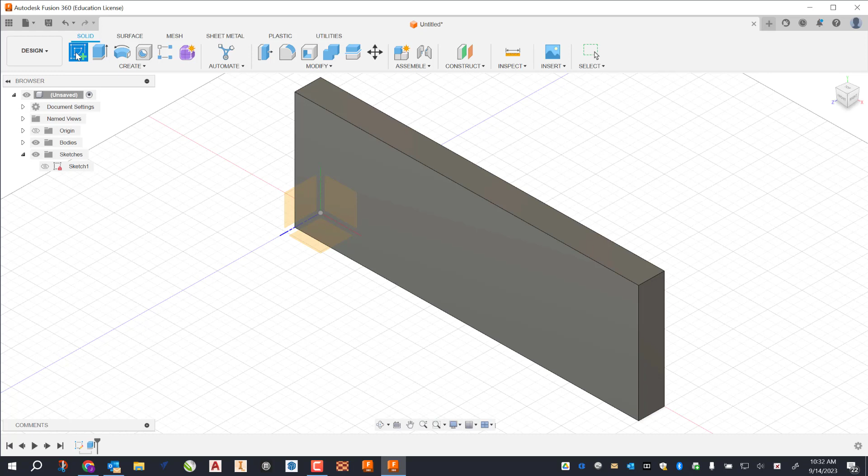So if you remember, everything always starts with a sketch. So I have it in isometric mode right now. This is what I like to do so I can make sure I can select the correct face. So I'm going to go ahead and create a new sketch. And just like the last time, it's asking me where to draw this sketch. I want to make sure I'm drawing it on that front face. If you notice, that's kind of highlighted. I want to make sure again that this front face is highlighted, and then I can click on that.

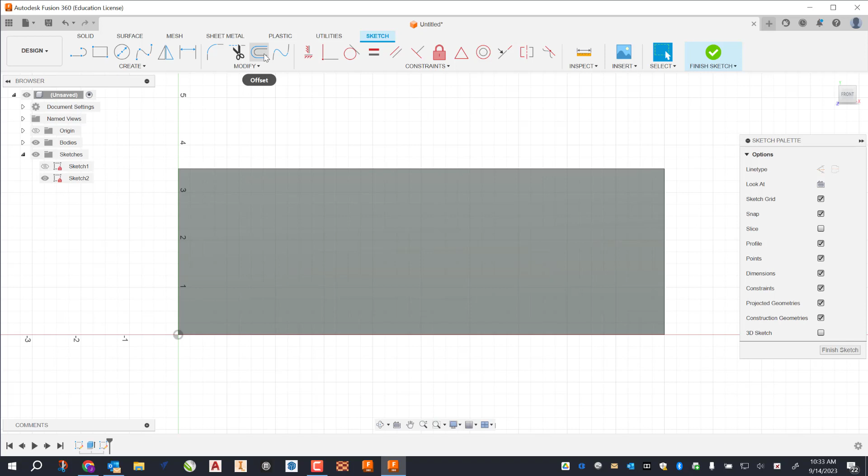So now that I've got my front face highlighted, the first thing I want to do is just create that recessed pocket. So I'm going to use what's called the offset tool. Under our modify, we've got our offset tool right here. If you don't see it up here in the toolbar, if you click on modify, it will come down here to the drop down, and I'm going to go ahead and select my offset tool.

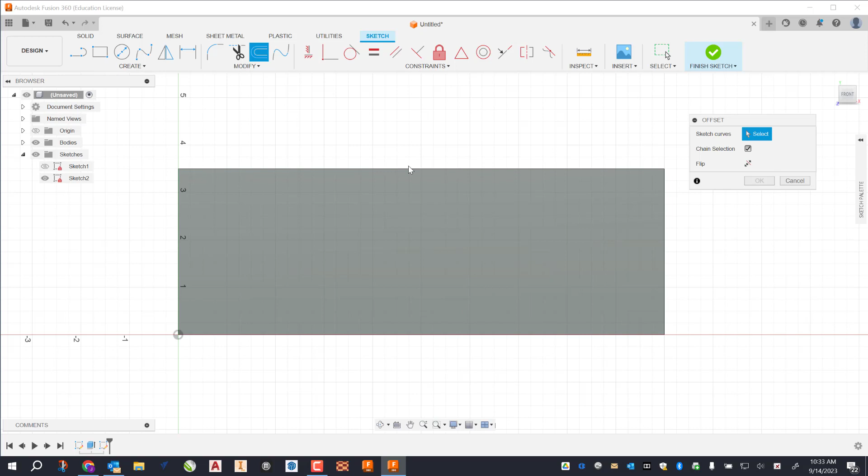I'm going to have that toolbar pop up here. I want to make sure that chain selection is checked. That's going to allow me to select the entire rectangle here. So I'm going to grab that. I'm going to hover over it till it's highlighted, and I'm going to click to select that.

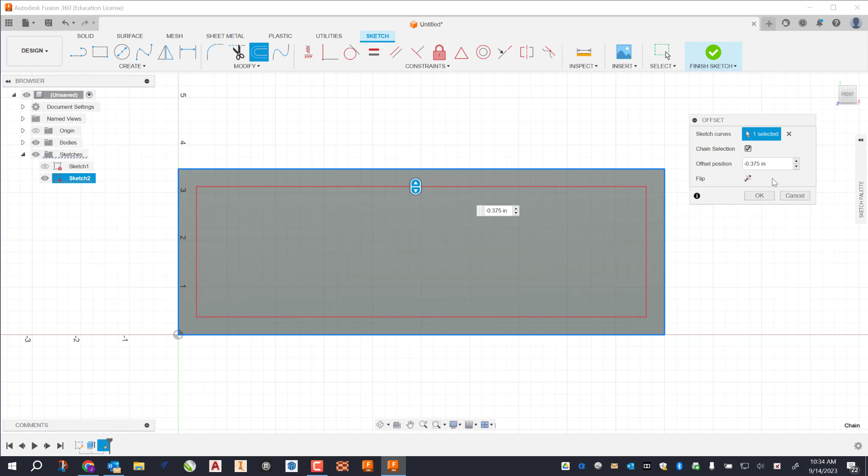All right, my offset, I'm going to offset this 3/8 of an inch. So 0.375 - sorry, let me type that in again. 0.375. Now if you notice, it's offsetting it to the outside. So if I want to offset it to the inside, this number needs to be a negative number, or I could just come over here and click that little flip button, and it will make it that negative number for me. All right, once that's offset, I can just go ahead and click OK.

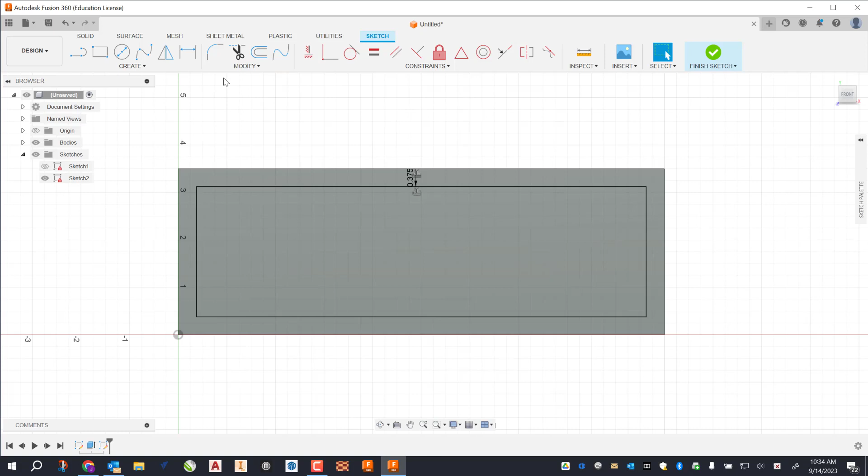All right, I do want to round over these corners here as well, just to make it a little bit easier. So for that, I'm going to use the fillet tool. Again, that's up here under our modify. If you don't see it in the menu, it's going to be here. If I hover over that corner, you can see it adds that red line to fillet. I'm going to click on all of these corners, and then I'm going to set my radius. So you can see my radius is right over there on the side here. I'm just going to set my radius to the same thing, 0.375. All right, you can see that just gives me a nice, subtle round over there. So from here, I just go ahead and hit enter, and I've got my fillet.

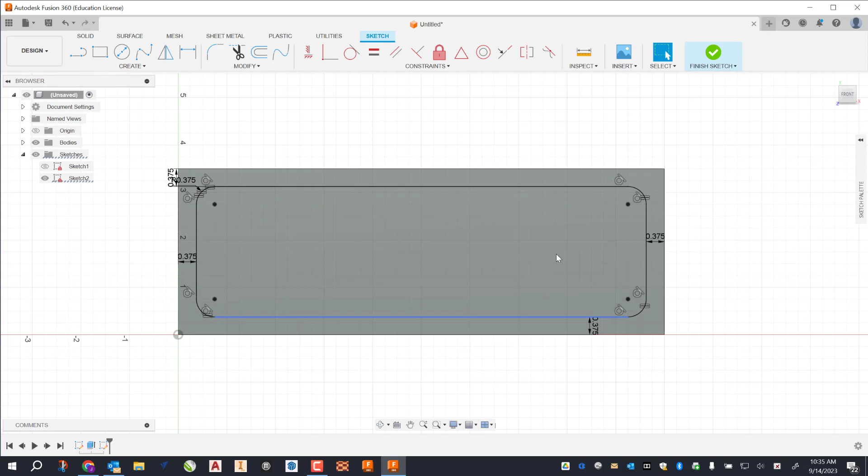Okay, so I'm just going to go up here. I'm going to go ahead and click save to save my work, and then I'll come back.

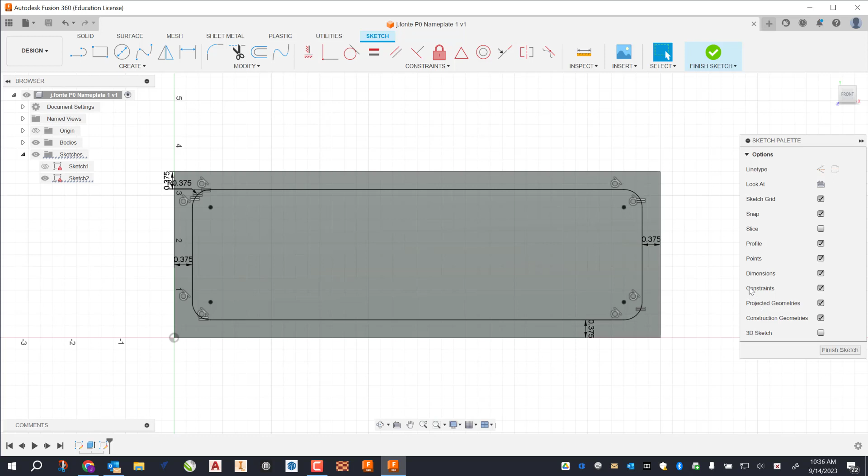Okay, so now that my work's been saved, what I'm going to do now is add some text. So one of the things is this is starting to look a little bit busy here. I've got a lot of these icons. I've got measurements, I've got constraints. So over here under the sketch palette, I'm just going to go ahead and uncheck those to get rid of those. So my dimensions, I'm just going to deselect that, and my constraints, I'm going to deselect that as well. I'm just doing that to clean it up, make it a little bit easier to look at.

So again, I'm still in that sketch. You can see I haven't closed out of it yet. I've got my original sketch for my rectangle, and now I've got sketch number 2 for this pocket.

So now what I want to do is go ahead and add my name in here. Under Create, if I click on that, there's the text tool.

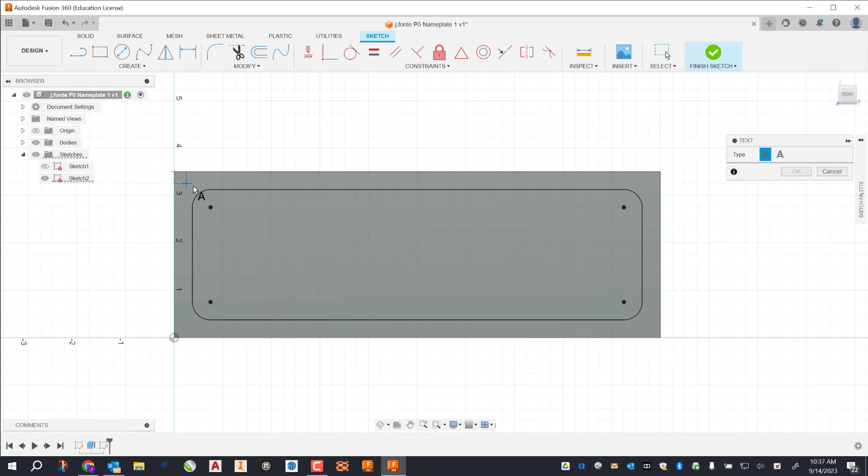What I found works best is to select and draw my text box the same size as my rectangle. It just helps me center this. You can see I've got sample text here, and this will allow me to, just like any other text tool, type out what I want.

I can select my font. I'm just going to pick a pretty basic one. All right, fairly simple, fairly basic.

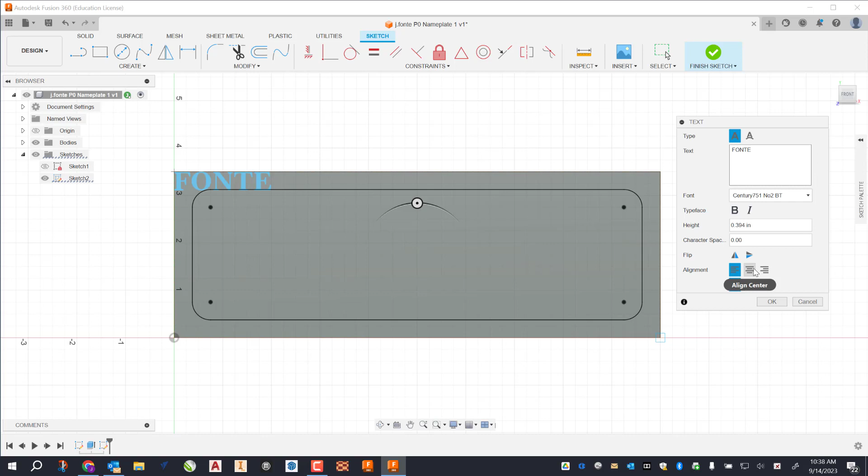It's still pretty small, and I want to have it centered. So what I'm going to do is align that to the center as well as to the middle. Now you can see it's in the middle and in the center.

I am going to make it bold, just to make it a little bit easier to cut out. Then I'm going to change the sizing of it. Let's try 2 inches tall.

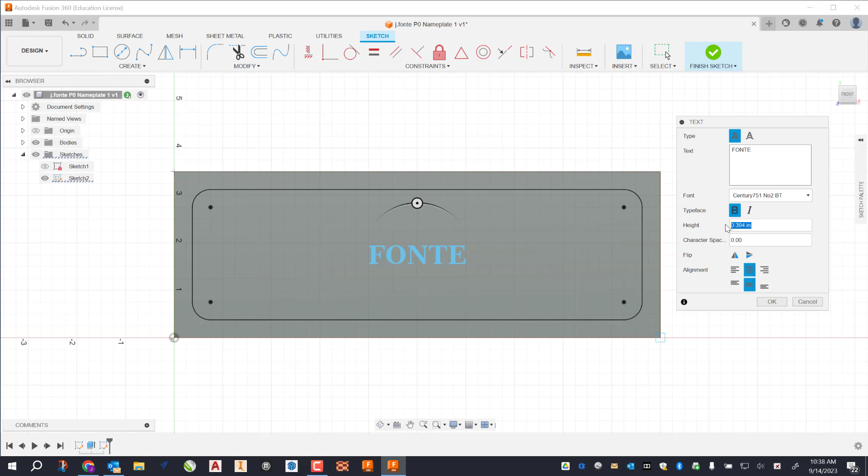So that's way, way too big. Let's go 1.75 - still a little bit too big. Let's go 1.5. That looks pretty good.

If I wanted, I can make it italic as well. I can arrange the spacing - say I want to spread that out a little bit more. I just went ahead and typed in 15.

I'm not sure if I'm able to, but if I wanted, I can even rotate it. So I'm going to go ahead and rotate that a little bit. I think that looks pretty neat.

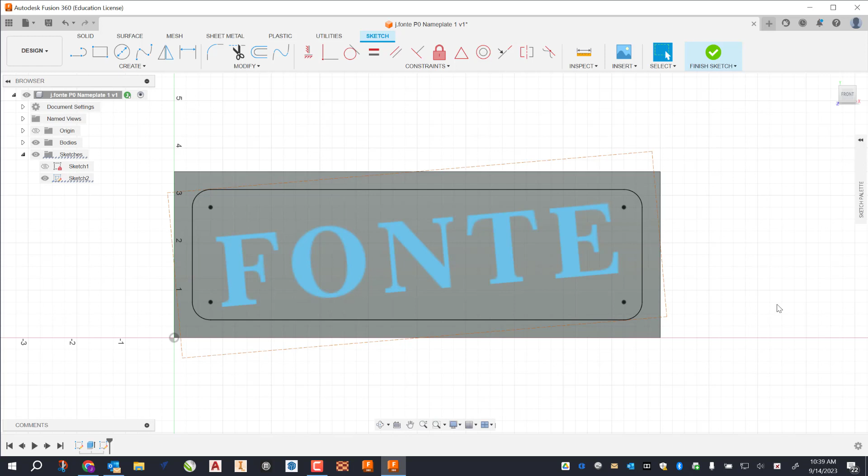So I'm happy with how that looks. I just go ahead and click OK. The key is you want to make sure it's not touching this pocket that's here, and that you've got a little bit of distance between the two. Then I click OK - so I've got my text, I've got my line.

Now my text, if I want to change this, I can just double click and change it.

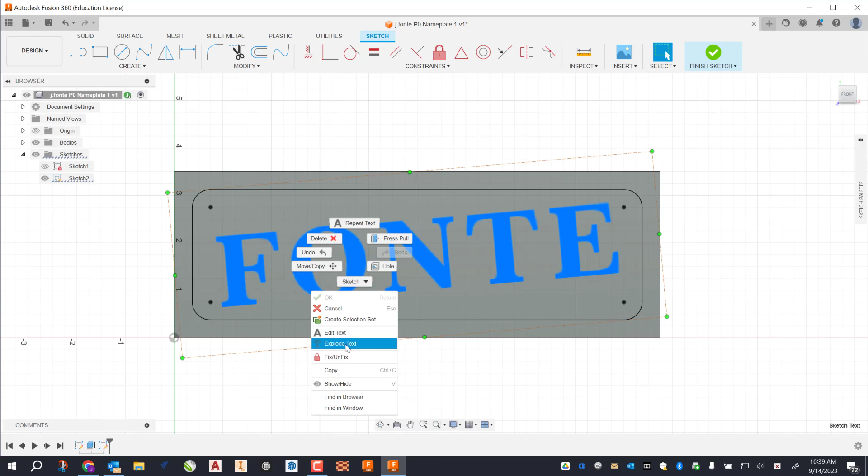So what I want to do now is actually make this text into lines. The way I do that is right click on it and go down to explode text. Now you can see it's made that into a line drawing.

From here, I'm happy with how everything looks. Again, this is just a line drawing that's on the front face of my work. So now what I want to do is extrude that in - I want to push this part in to give a recess.

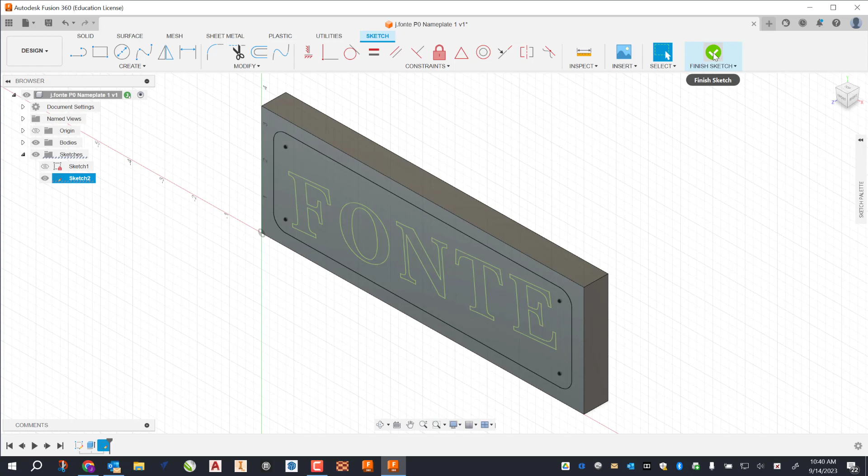So I click Finish Sketch. I go over here to my Extrude tool and select that. I click my face here, and I also want to make sure I click the inside of any interior letters.

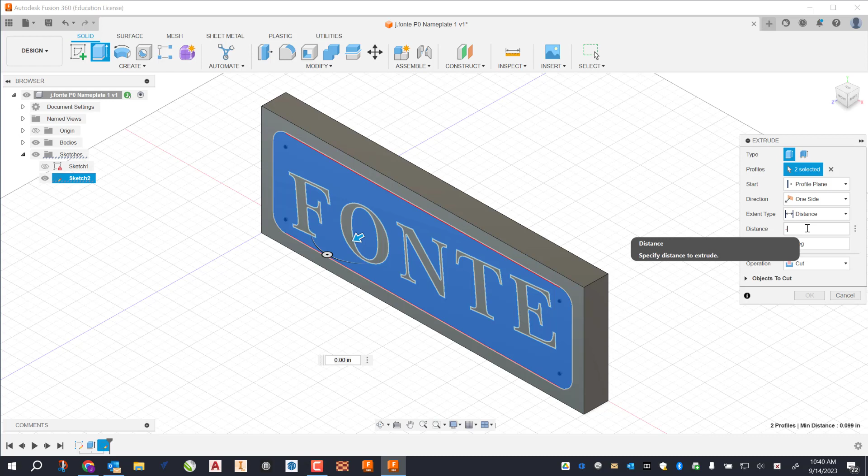I'm going to do a cut, so it's actually going to be a negative number - my operation is going to be cut. This is going to be negative 0.375, so 3/8. You can see it kind of does it, and you can see that little pocket that it cuts out.

And then I click OK. So there you have your little pocket, your text that sits there. I'm going to go ahead and click Save. In the next video, we're going to start to do our tool paths. All right, thanks a lot.